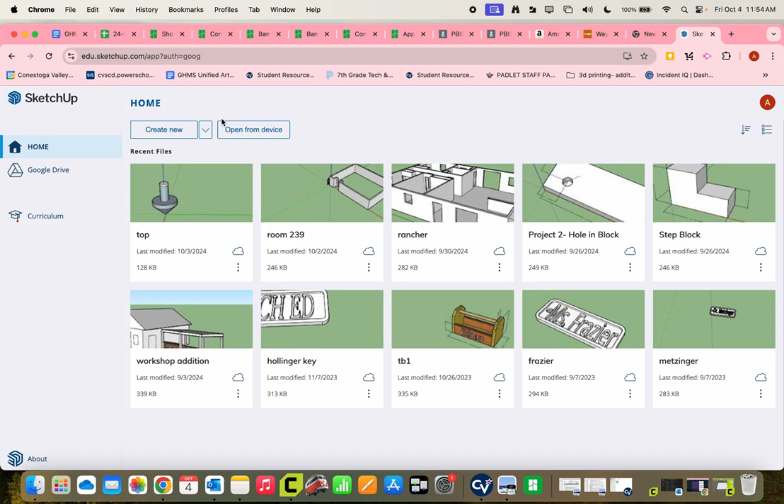Alright, ladies and gentlemen, in order to make the keychain in SketchUp, you're going to go to SketchUp for Schools, click on this drop-down arrow, and select decimal in millimeters. The keychain is pretty small, so you're going to want to zoom in close to the origin point.

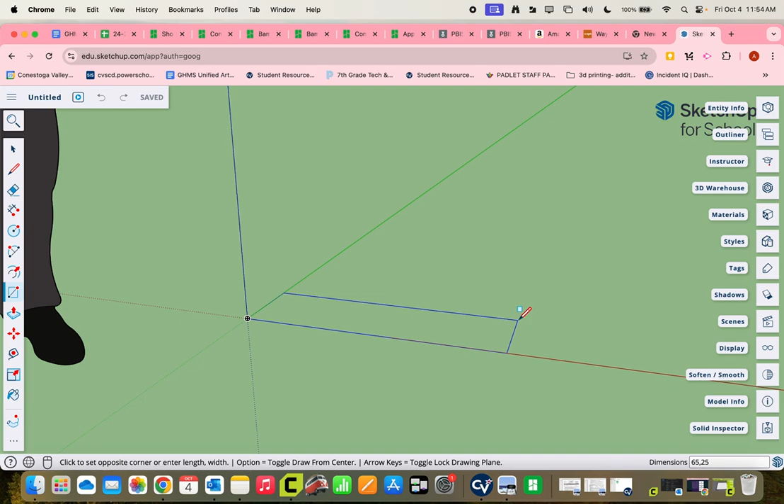We're going to use our rectangle tool, and the length and width of the toolbox are 65 in length by 25 in width. So 65, 25, and then the enter button. That gets us the beginning of the keychain.

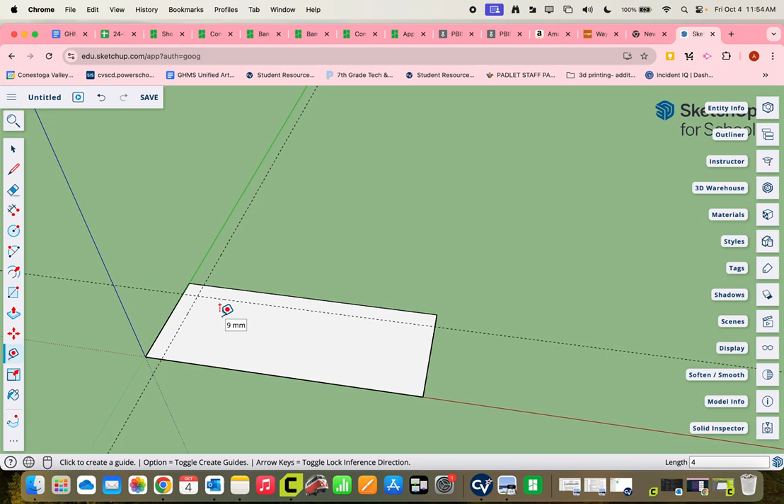From there, we're going to use our tape measure tool to give us guidelines. So we're going to measure back, undo that, grab this line, here we go. We're going to measure back 4 millimeters. I know it said 9, but don't go by what it says at the tape measure - go by what it says in the lower right corner, and that's what I'm typing in. So 4 all the way across.

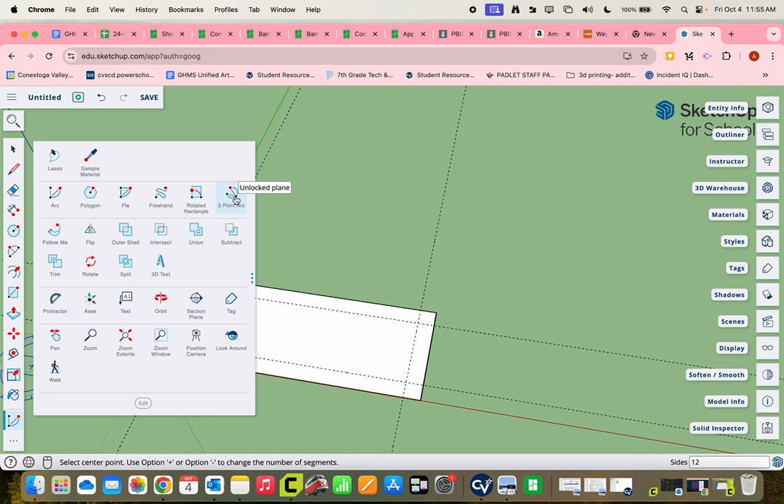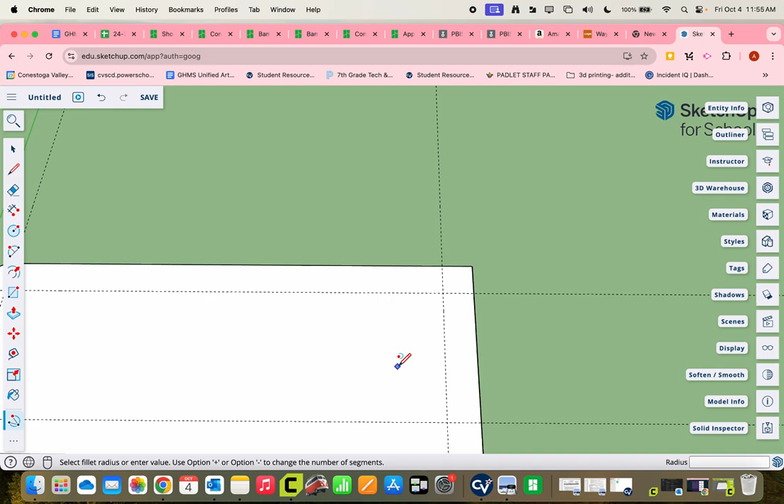Now the next step requires rounding over the corners, and for that we're going to use the arc tool. I've got a couple of arc tools here - I'll go with this one. I'm going to click on the intersection and then double click on the other intersection. If it doesn't work, try orbiting a little bit, changing your camera angle - that seems to wake it up. So click on the first intersection, double click on the last one, and you get these nice rounded corners.

The next step would be to erase those guidelines. You don't need those any longer - they were just to help you round over the edges.

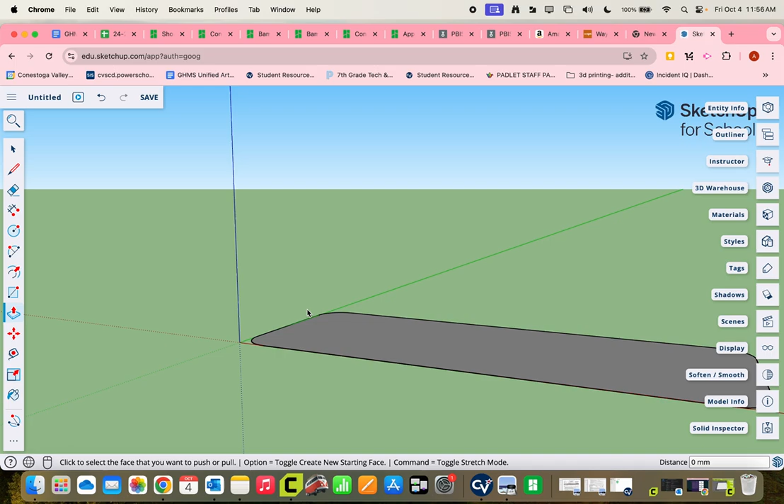Right now this keychain has no thickness at all, so we're going to use our push-pull tool and lift it up 3 millimeters. We're going to type in the number 3, hit enter, and there we go. This is a great time to throw a dimension on there and double check - that is in fact 3, and that's what it ought to be.

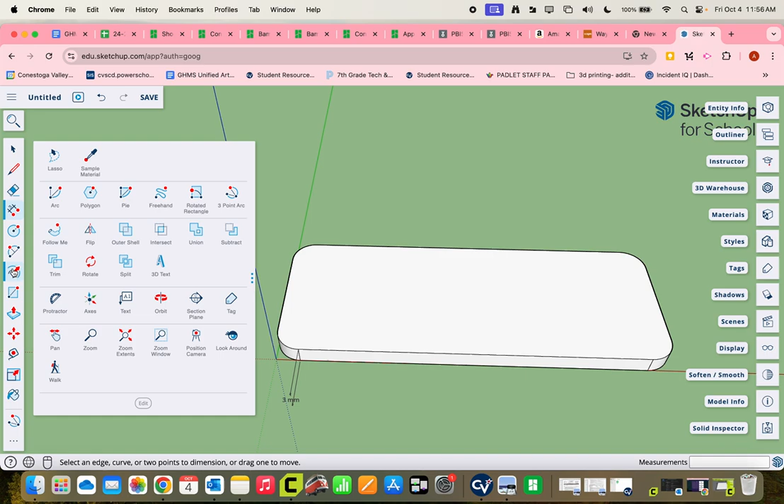Now I'm going to use the offset tool - this is what we used to make the walls when we made the living room. The offset tool looks like this; it might be in your tool panel, but you can drag it out, or just hit the letter F on the keyboard. For this, you're going to click on the inside, and move this so that it is 2 millimeters from the edge. I'm going to type in the number 2, hit enter, and there we go.

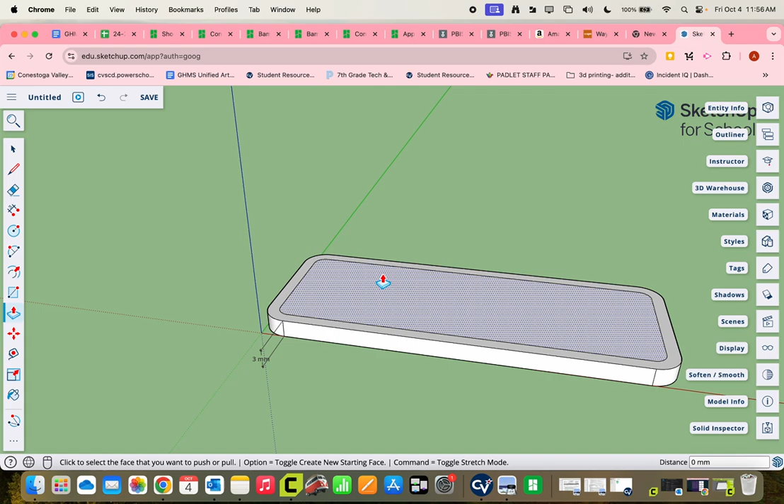Now we're almost finished, believe it or not. We're going to take the push-pull tool and push this center section down halfway. If the whole thing is 3, and we want to go halfway, we go down a little bit and type 1.5, then enter. You'll notice in the lower right corner where it says distance, it now says approximately 2. You did it correctly, but SketchUp is rounding up to the nearest whole number - so it says approximately 2, but it's correct, it's 1.5.

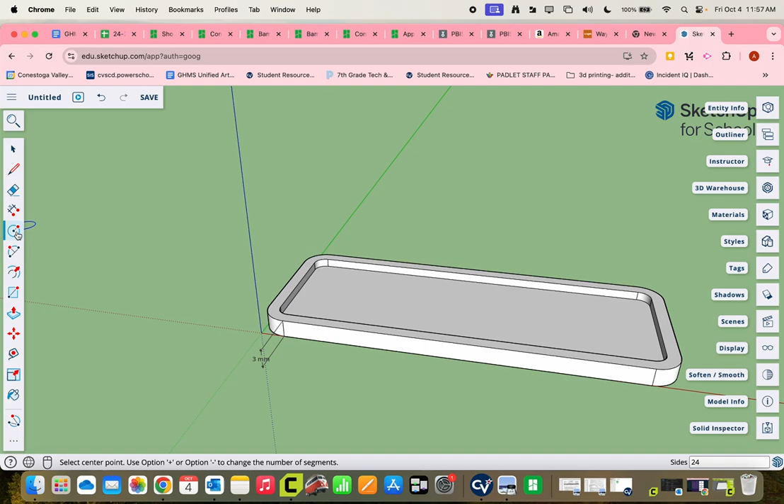We now need to put a circle through it. So what we're going to do is take a tape measure, click on this lower line, not up top here but down here, and drag a guide out. We're going to come out 4 millimeters, so I'll type the number 4 and hit enter.

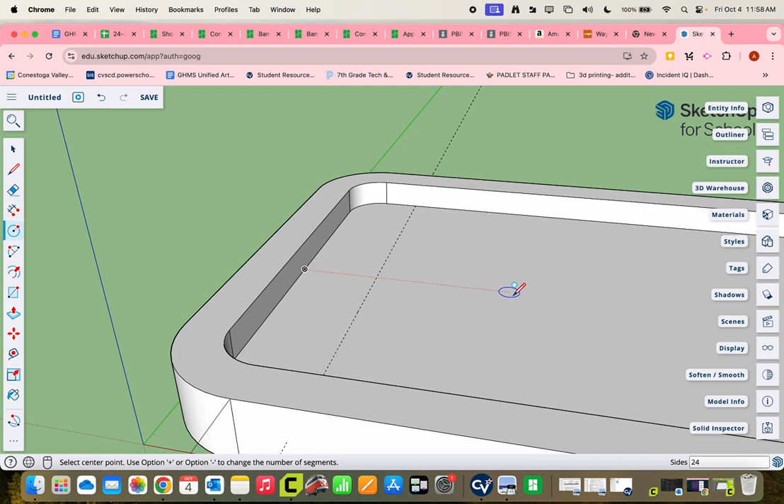Our circle is going to go somewhere on that line in the middle. So we're going to take our circle tool now, and what I'm going to do is not click the mouse, but drag it to reference the midpoint. There's the midpoint - I still have not clicked the button at all. Now when I move away from it, it gives me that small dashed line that tells me I'm in the middle, in the center of the project, and I want to start my line right there.

I'm going to click, drag out a circle, and we want the radius to be 2.5, which would give us a 5 millimeter diameter circle. So, 2.5, enter. I can erase my guide tool or guideline.

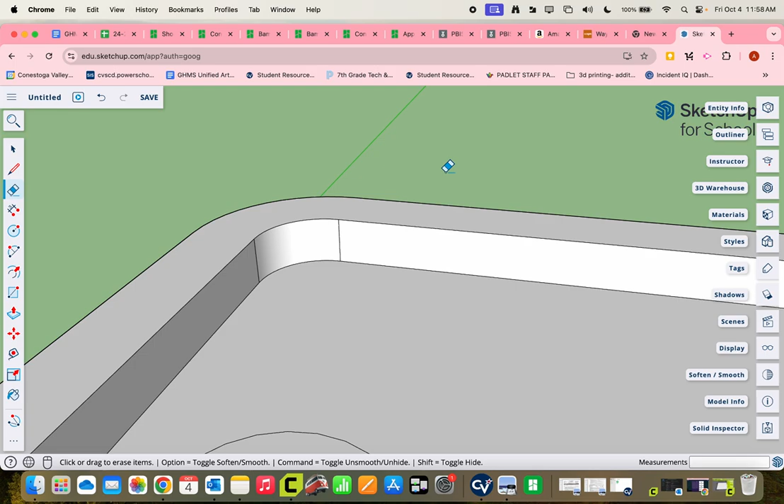I can also erase this dimension. And now, much like opening up the windows for the living room, I'm going to click on the circle, and click on the bottom edge. It cannot go down like this, okay, we can't 3D print it if it has something hanging out from the bottom. So I need to click my mouse on the edge like that, and now I'm going to check. That looks good, it's open.

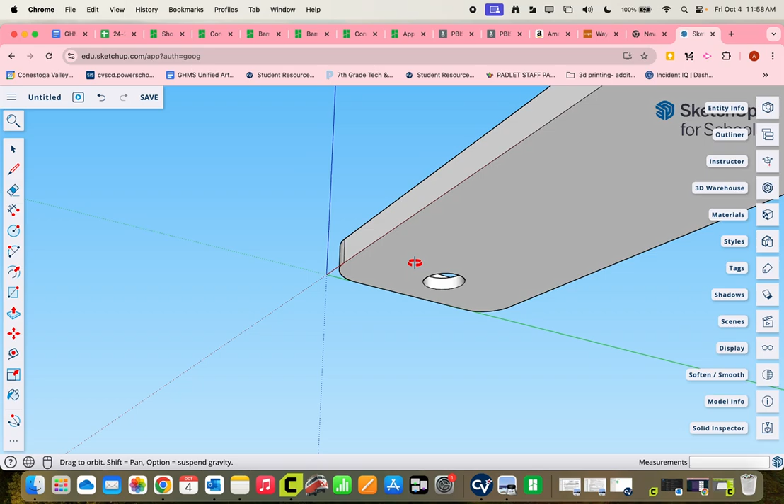We are almost there. The next thing we've got to do is add our text. To add the text, we're going to open up the text tool, the 3D text tool, which is right here. I'm going to open up the 3D text tool, and this is where you're going to type your name.

I'm going to make one for my son, Henry, like that. And the bigger the text, the better it's going to look. So I'm going to select this, and I'm going to select maybe the permanent marker, that would work. Or you can do this one and make it bold, that'll show up a little bit deeper.

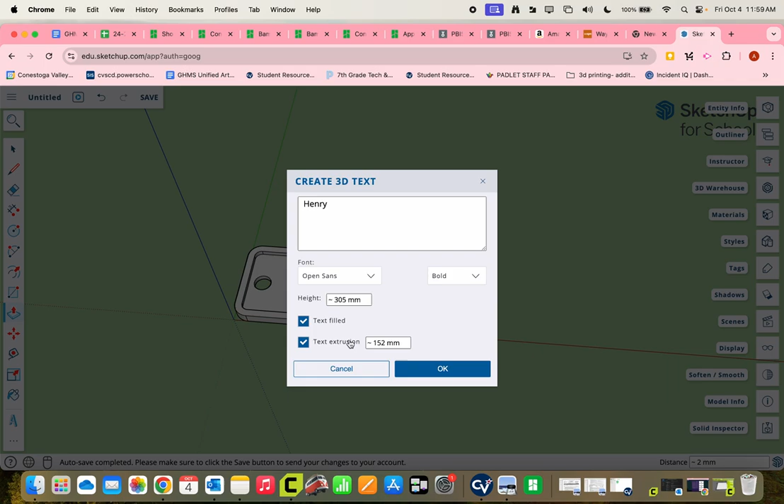But the most important part here is the height and the extrusion. The height of your text should be set to 18. The extrusion, which is how far off of the edge or face it's going to stand up, kind of like the thickness of the letters, we want it to be 1.5. Now again, that's going to look like a 2, but there we go. We've got letters that are now 18, and that means they'll fit inside here, and they're standing up 1.5 millimeters.

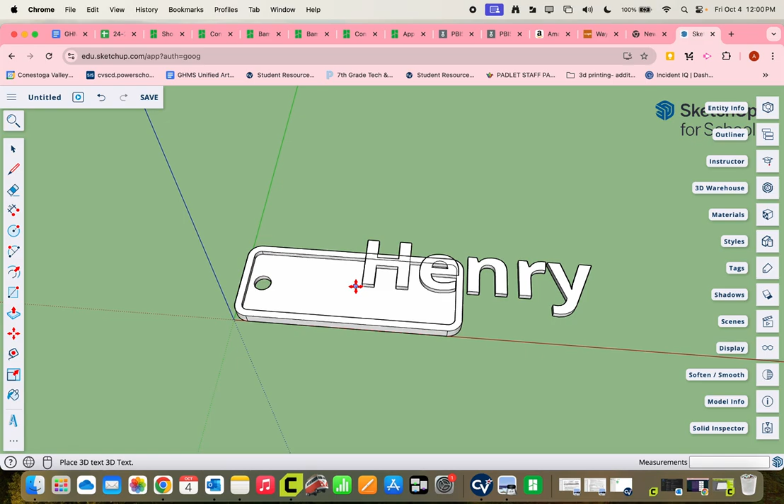So what I'm going to do is click on face, just like that. Now that it's on the face, they're not sticking above or below the keychain. I can now drag to get it close to where I want it, something like that. And I can go just close to that circle, but not getting an intersection with it.

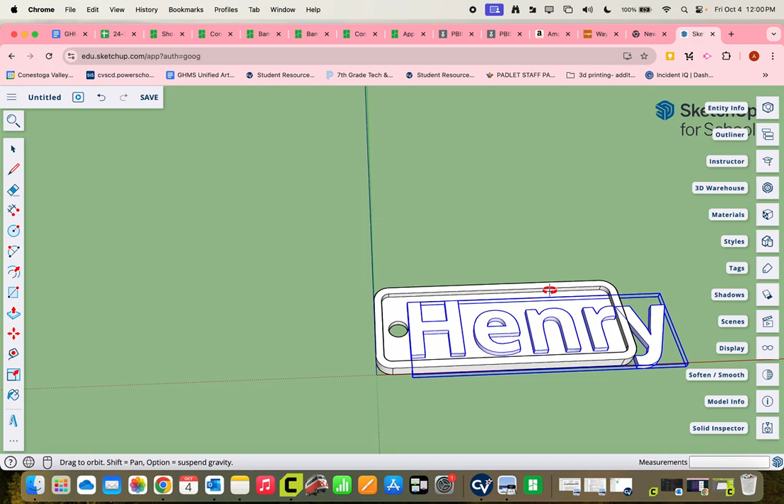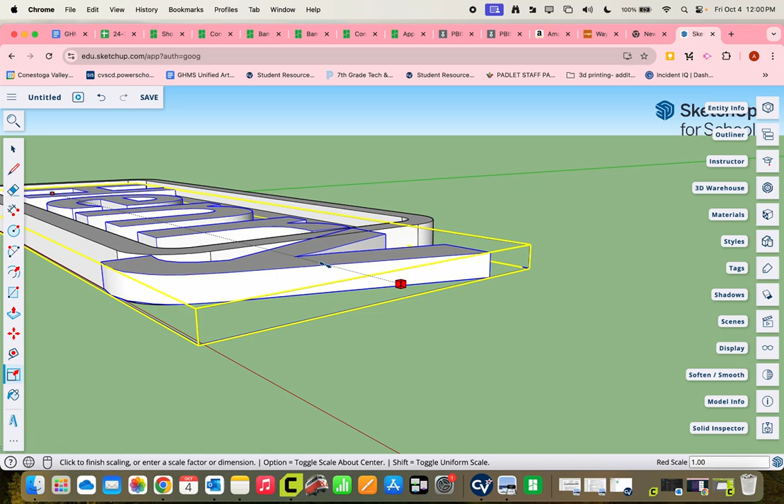And now I need to scale the letters so they'll fit. So from this side, I'm going to come over here and pick up my scale tool. The scale tool has a lot of confusing looking boxes here. It's really important that you zoom in and click on the center button. The center button is going to allow you to change the length of your model without affecting its height or width. So I'm just going to shrink the text so it fits inside there like that.

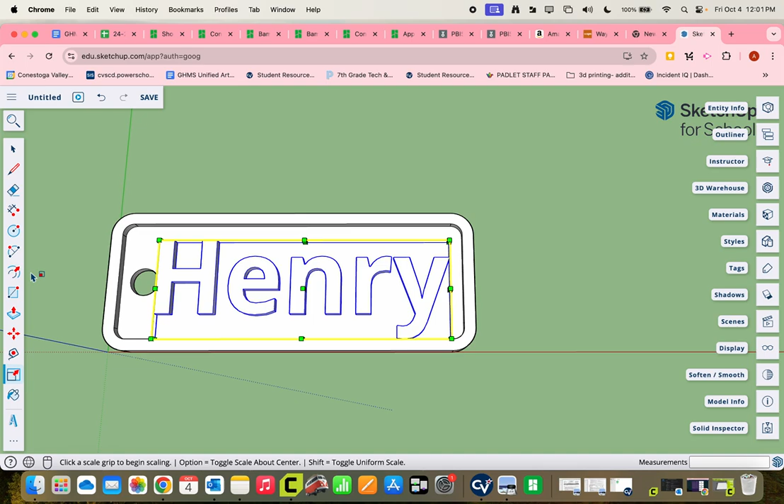You'll also notice this Y is going to need adjusting as well, so that means I got to click on the center button here and push it in a little bit. And that looks like it could work. I think I can hit the move tool and scoot this all up a little bit more, maybe like that. Then I'll click off of it.

And there we go, we have the keychain. Nothing is on the bottom, that's super important, the bottom has to stay flat. The hole is all the way through, and the text is flush with the top edge of your keychain.

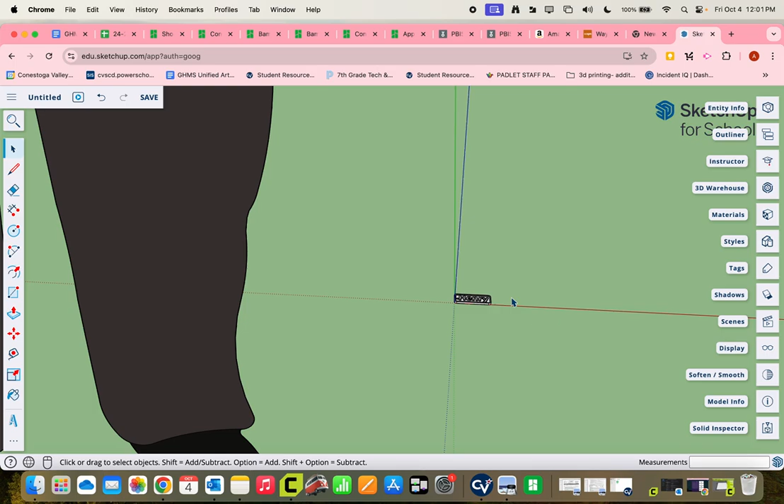Now we have to delete the person. So you got to zoom out, click on the person, hit the delete key. That's really important, otherwise the 3D printer will tell me that the object's too big because it's trying to print a person.

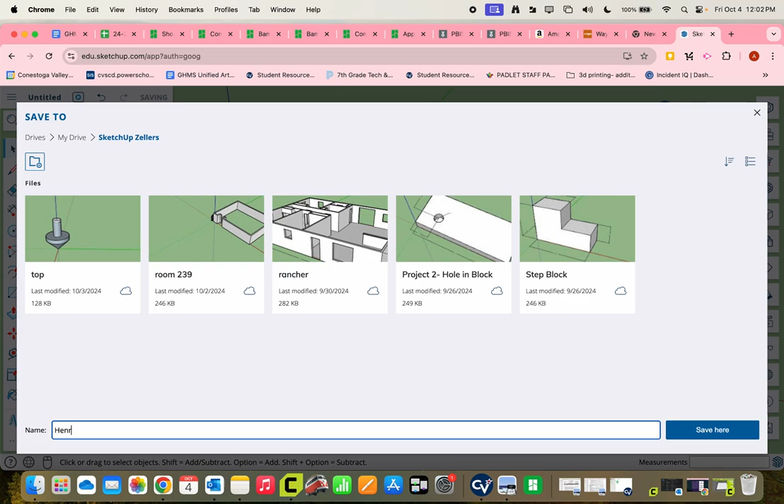Now, the other important thing is when you give it a name, you have to title it your name. So I'm going to go into my drive here, I'm going to select my folder, and this is where you would put your name. Even if you're putting your dad's name on the keychain, I still need your first name right there. You're going to hit save, and now the object is saved.

The next thing is to download it. So you're going to click on your 3 lines, you're going to go to download as an STL, download as an STL file. Click on the download button. When you hover your mouse over here, you're going to click on this folder.

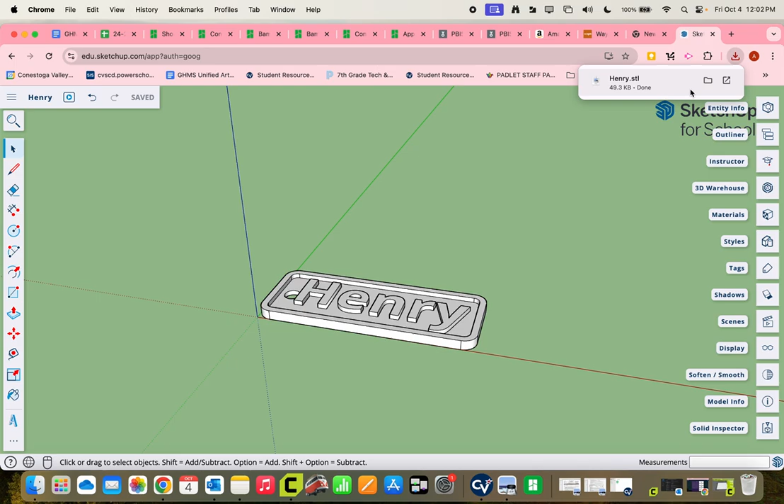And at that point, I will help you get it to the 3D printer. My computer's a little different than yours, so I can't show you all the same things. Yours will look different, but you will see there's a 3D printer drive that you have access to. And then you are finished with the keychain.